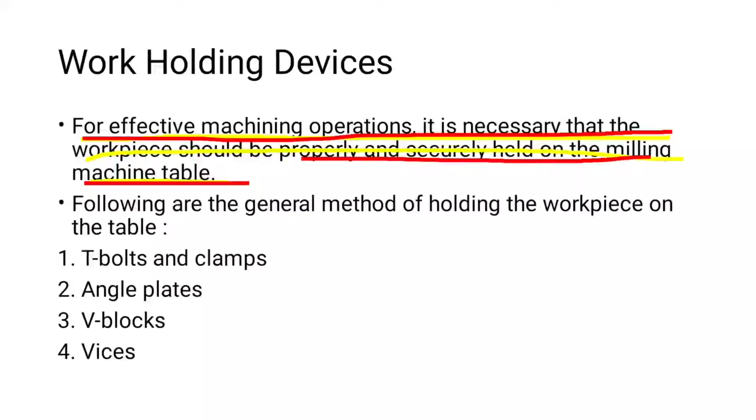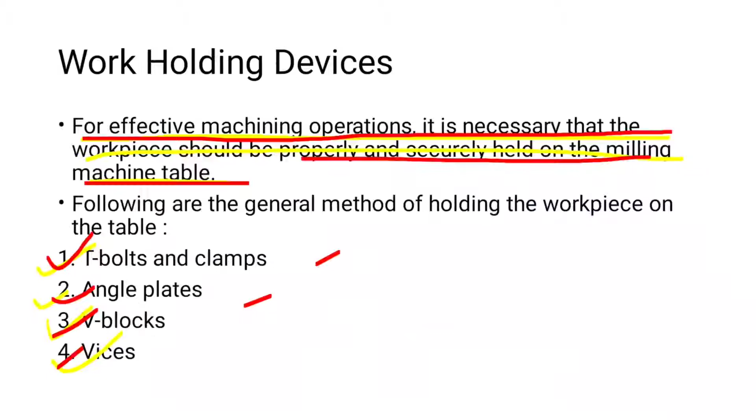Now there are generally four following workpiece holding devices, from which first is T bolts and clamps, second is your angle plate, third is your V block, and fourth is your vise. So these are the four things we are going to discuss in today's lecture.

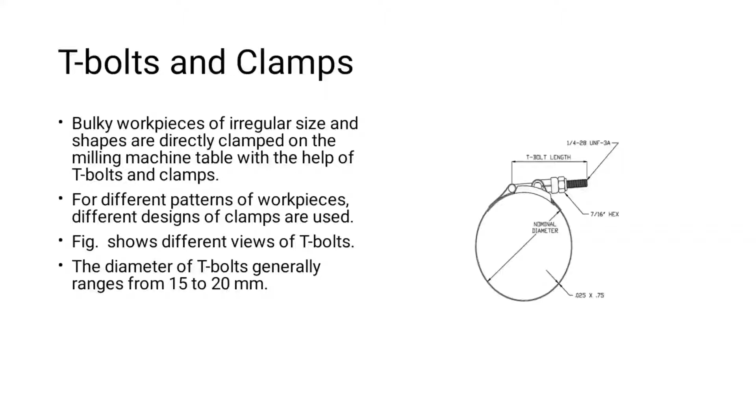Next, okay, let's start with the T bolts and the clamps. What are T bolts and the clamps? So bulky workpiece of irregular size and shape are directly clamped on the milling machine table with the help of T-bolts and clamps. Mark the words: bulky workpiece of irregular size. Is it clear? So, for what components are the T-bolts or clamps used? It is clear now.

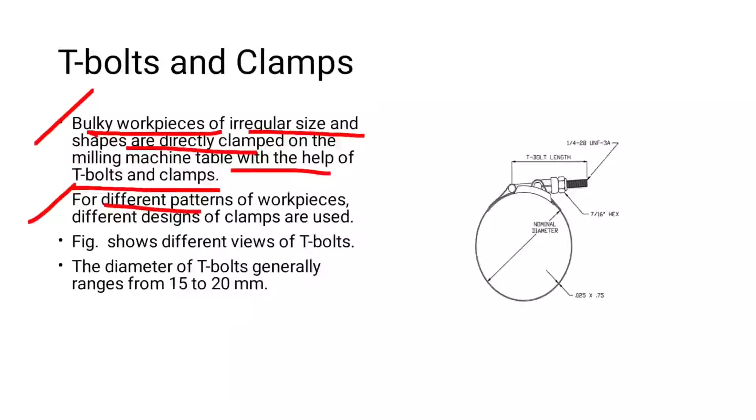Next is, for different patterns of workpiece, different design of clamps are used. If the pattern is different, then the different type of clamp is used, respectively the shapes of the workpiece which we are using. Is it clear? Now this is the figure which shows the T-bolt or clamp for cylindrical workpiece. Now the diameter of T-bolt generally ranges from 15 to 20 mm. So the range for the T-bolt is given over here.

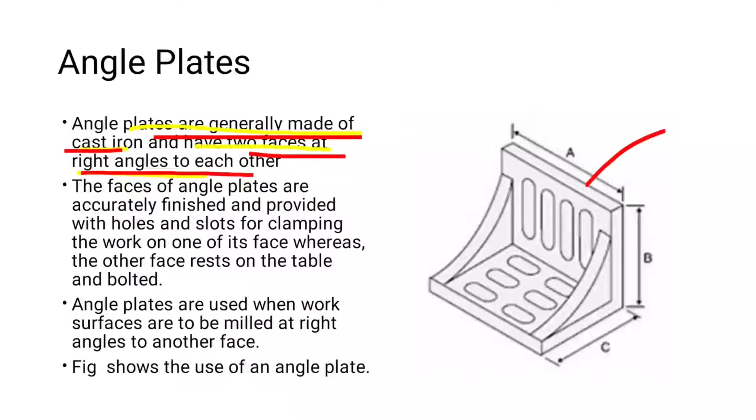Okay, and this is the theory which I have marked has to be written by you in the exam. Now the next point is your angle plates. So what are angle plates? Angle plates are generally made of cast iron and have two faces at right angle. So this is one face, this is one face. Angle is 90 degree, and the material we have got is cast iron. Clear? Material is known, structure is known.

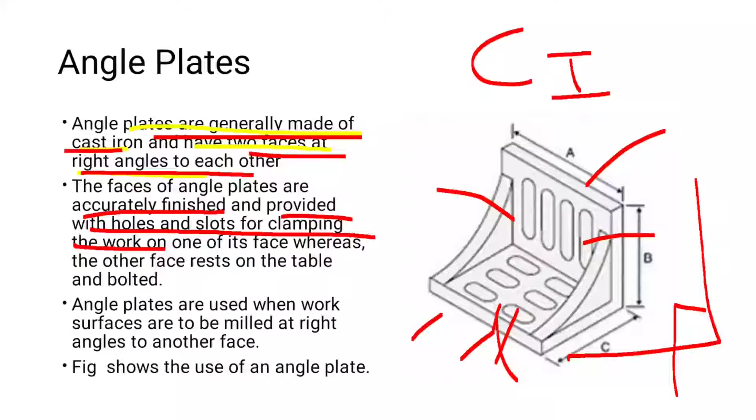Okay, the faces of angle plates are accurately finished and provided with holes and slots for clamping. So these are the holes and slots which are provided on the angle plate for clamping, and it is accurately finished. So the finishing for the angle plate is good. Whereas the other faces rest on the table and are bolted. So again we got to know the structural thing about the angle plate, that slots are provided, holes are provided, and for what purpose they are provided.

Okay, angle plates are used when work surfaces are to be milled at the right angle to another face. Now when the angle plate is used is given in this point. When you have to mill the work surface at the right angle, then this type of work holding device is used. Which is it? It is the angle plate. Is it clear? This is the diagram for angle plate.

Very easy diagram. You can draw like this, or here you can draw like this. Here you can show the bolt. So these are the two ways in which you can draw the diagram, but I'll prefer to draw this. Just looking at it, the examiner will give you the marks, and after drawing this you can describe it in words also easily. Is it clear?

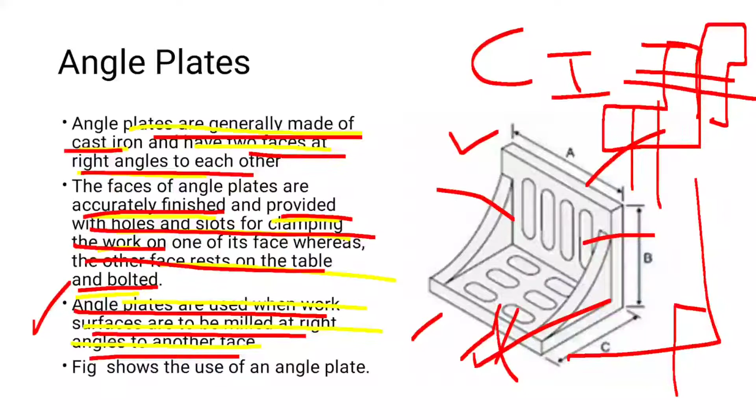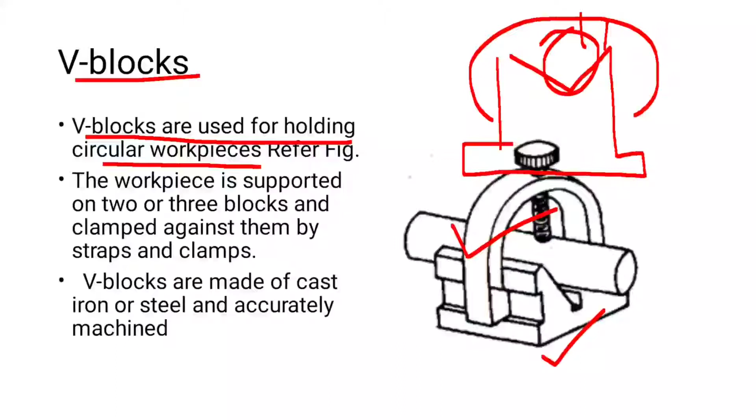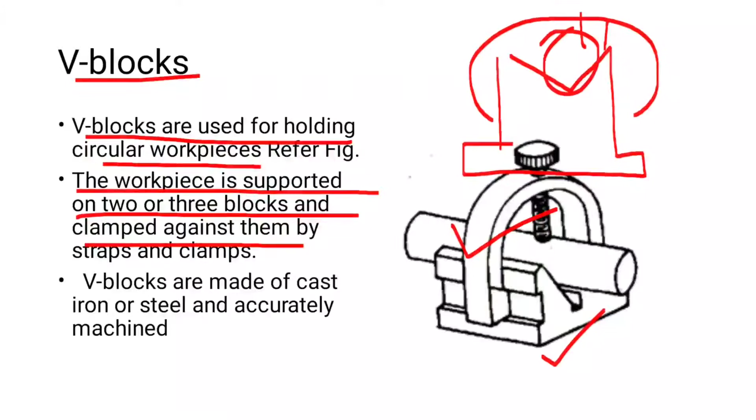The diagram for the V block you can get easily on Google; very simple diagrams are provided there. Is it clear? The workpiece is supported on 2 or 3 blocks and clamped against them with straps and clamps. So the workpiece, which is circular in shape, is supported by 2 or 3 V blocks.

Next point: V blocks are made of cast iron or steel and accurately machined. So we got to know the purpose of the V block, its structural information, and also the material of the V blocks. What is the material for V blocks? It is cast iron or steel. Function is to hold the circular workpiece.

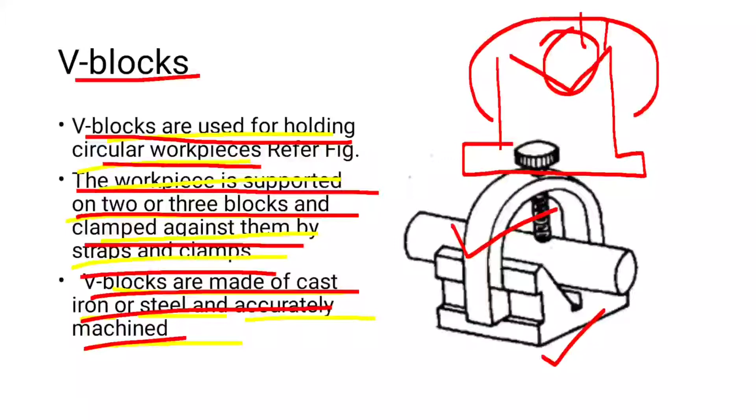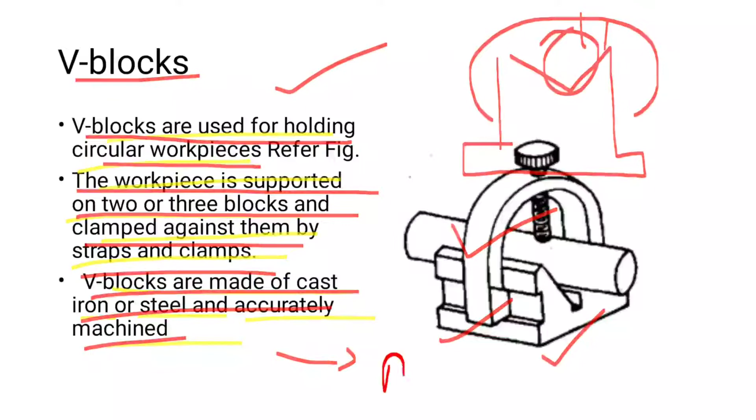Where can you find the V block? It can be easily found where there is manufacturing of pipes or working on pipes. If external threading of the pipe is required, you can easily find a V block there. Is it clear? So the basic and structural information about the V block is given to you. Just remember the material also.

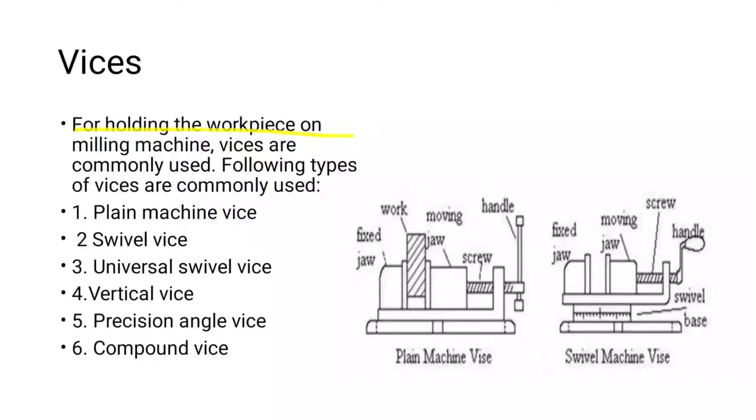Now the next point is vices. Let's see what vices are, which is our last work holding device for your syllabus. Let's start the theory now. For holding the workpiece on the milling machine, vices are commonly used. So what is the main function of vices? It is generally used to hold the workpiece in the milling machine.

This is the plain machine vise. This is the swivel machine vise. These are the different types of vices commonly used. There are total 6 types of vices. If you have visited small industries or even a garage, you can easily find the plain machine vise. In every industry, in the automobile sector also, vices are generally used.

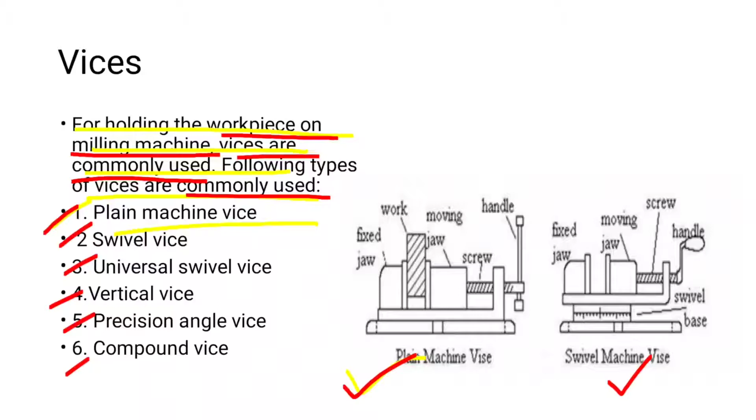So let's see the types of vices. The first type is the plain machine vise, whose diagram is shown here. This is the fixed jaw, this is the workpiece, this is the moving jaw, this is the screw, and this is the handle. The handle is rotated, the screw moves forward and fixes the workpiece between the fixed jaw and the moving jaw. Is it clear?

Second is the swivel vise. Third is the universal swivel vise. Fourth is the vertical vise. Then the precision angle vise and the compound vise. In vices, you just have to draw one diagram, swivel or plain; I prefer you draw the plain diagram, and write this information, because it's given in your syllabus. Write 2 or 3 types of commonly used vices and this whole paragraph.

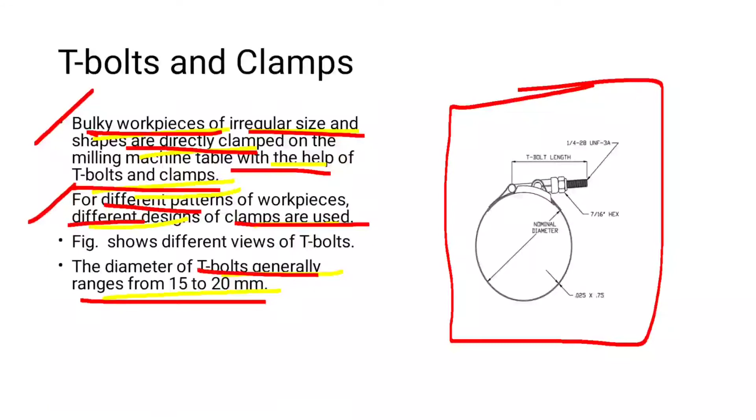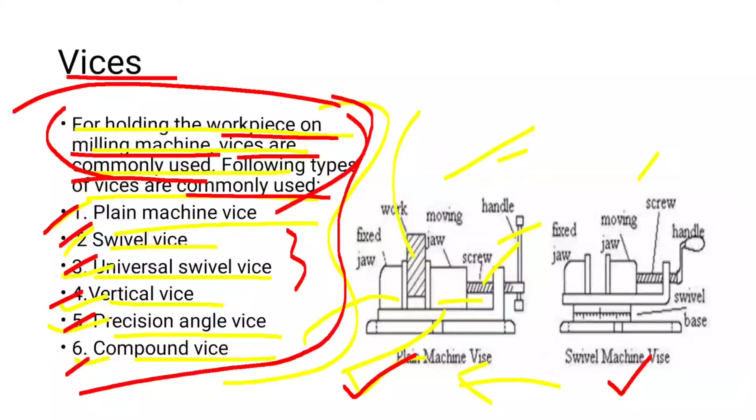So today we have seen the work holding devices: T-bolts and clamps, angle plates, V blocks, and vices. These were the four types of work holding devices. This was the topic for today's lecture. I hope you have understood it all.